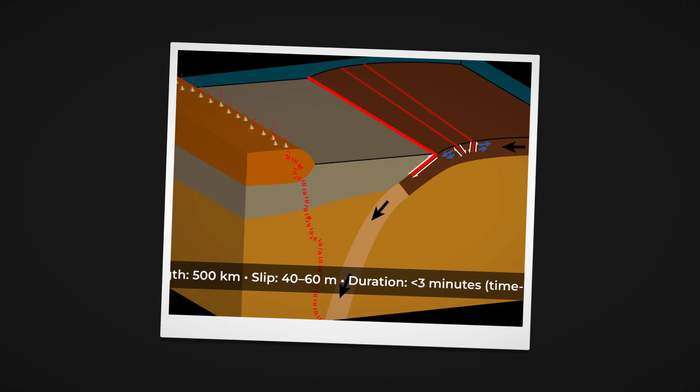On March 11, 2011, at 2:46 in the afternoon, a fault segment roughly 500 kilometers long beneath the Pacific Ocean off northeastern Japan slipped between 40 and 60 meters in under 3 minutes. The energy released was equivalent to approximately 9,000 Hiroshima bombs.

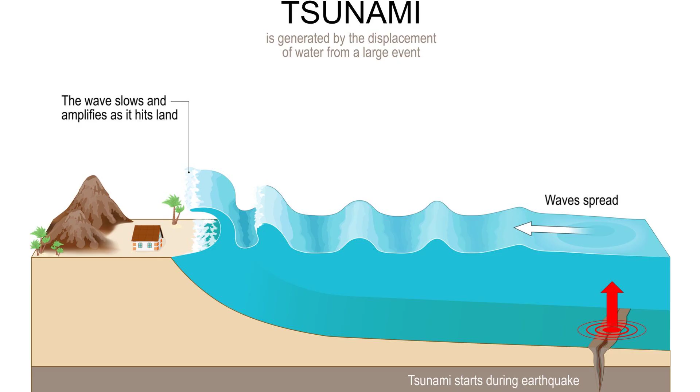The seafloor above the fault rose by several meters, and that rise transferred directly into the ocean above it. Within minutes, wave crests were moving toward the Tohoku coastline at the speed of a commercial jet aircraft. When they arrived, they were between 12 and 15 meters high. In some locations, they ran further inland than anyone's instruments had been positioned to measure.

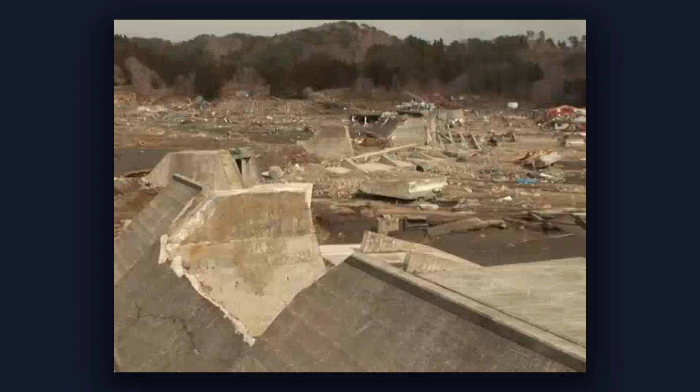The walls Japan had built to stop them were designed for 8-meter waves. They were overtopped in seconds. In several documented cases, the water crashing over the top of those walls fell with enough force to knock the structures apart from the landward side.

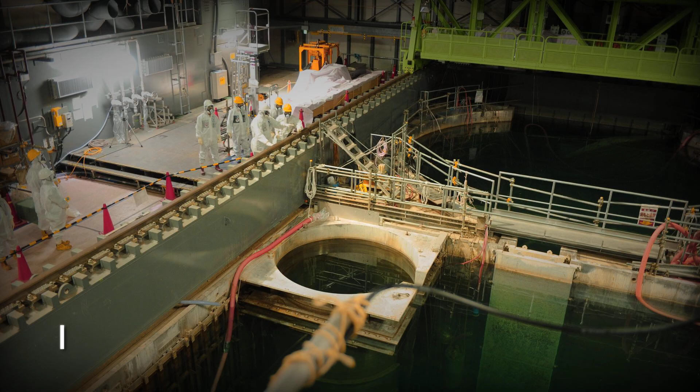More than 20,000 people were killed. Entire cities ceased to exist at the resolution they had occupied the morning before. The Fukushima Daiichi nuclear plant lost its backup generators to the flooding and entered a meltdown within days. Japan had been building coastal seawalls for decades before 2011.

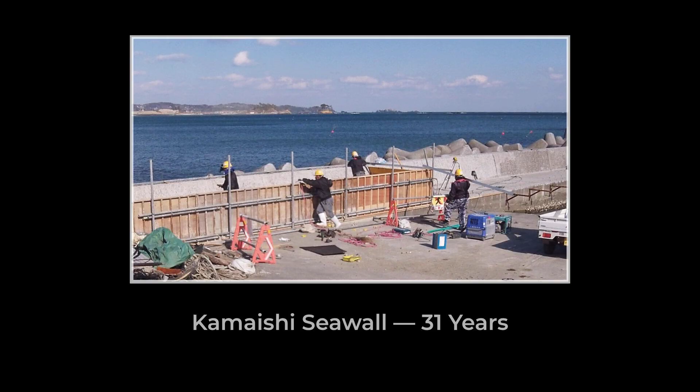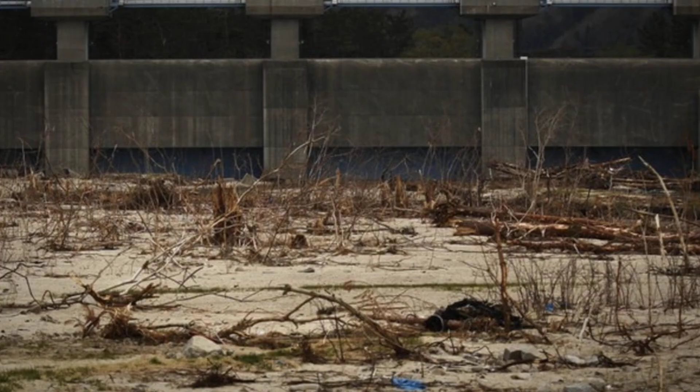The city of Kamaishi had what was then the largest seawall in the world, a structure that took 31 years to complete at a cost of $1.6 billion and which sat at the entrance to Kamaishi Bay. The 2011 tsunami overtopped it in minutes. Roughly 1,000 people in the city died anyway. That outcome did not mean the wall was irrelevant. It meant the wall had been designed within an understanding of the threat that the 2011 event rendered obsolete.

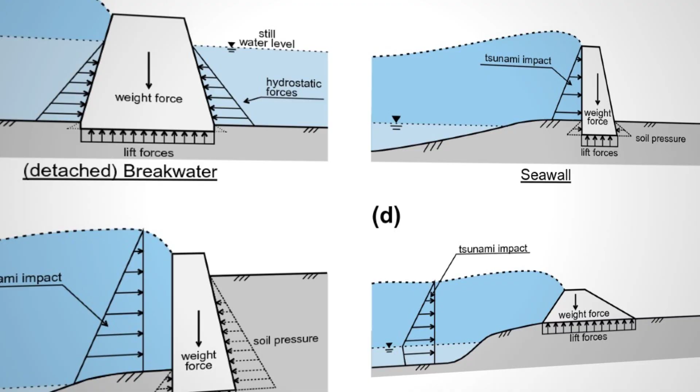The question Japan faced after the disaster was not whether to build walls. It was how to build walls that do not give people reasons to believe the ocean has been solved. The answer that emerged from years of wave tank experiments, geotechnical surveys, and engineering review was a seawall system that explicitly does not promise to stop the largest possible tsunami.

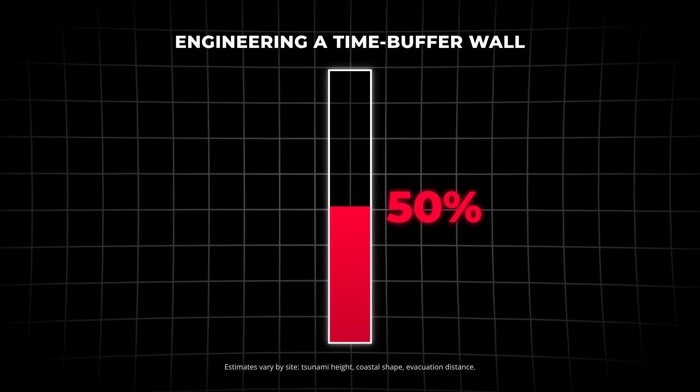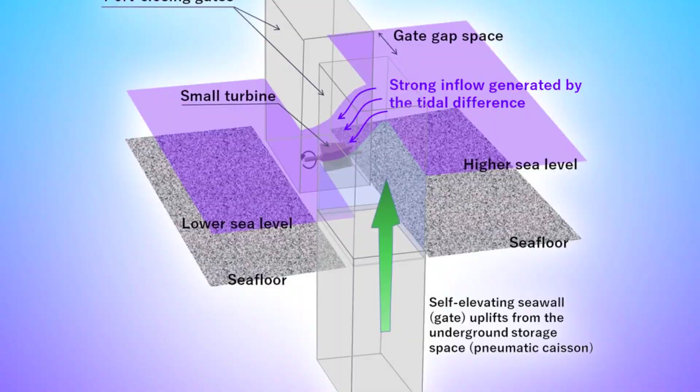It promises to reduce the destructive force of a medium-scale tsunami by 30 to 50%, and to delay wave energy long enough to give residents several additional minutes to move to high ground. Those minutes are the design specification. Everything else is engineering in service of that number.

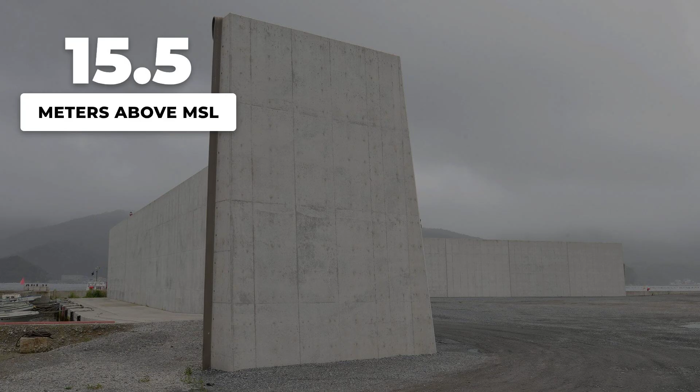The walls now rising along the Tohoku coastline in Iwate, Miyagi, and Fukushima prefectures stretch roughly 395 kilometers, with plans to extend the network to 430. The tallest sections reach 15.5 meters above mean sea level. The foundations beneath those sections descend 25 meters into the coastal sediment.

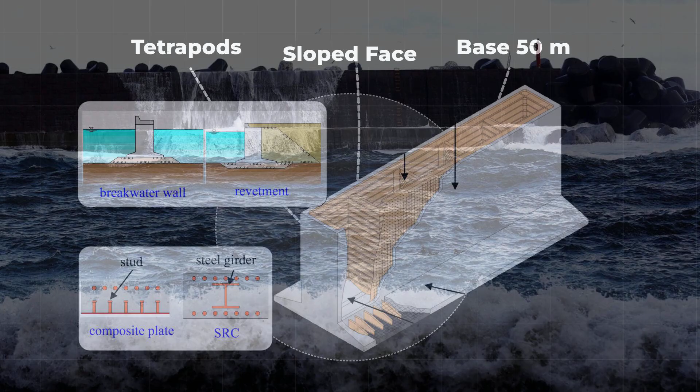The base of the widest sections extends 50 meters at the foot, narrowing upward in a trapezoidal profile that distributes horizontal wave impact across the full mass of the structure rather than concentrating it at any single point. Before any concrete is poured, the coastal sediment must be made capable of holding what is placed on it.

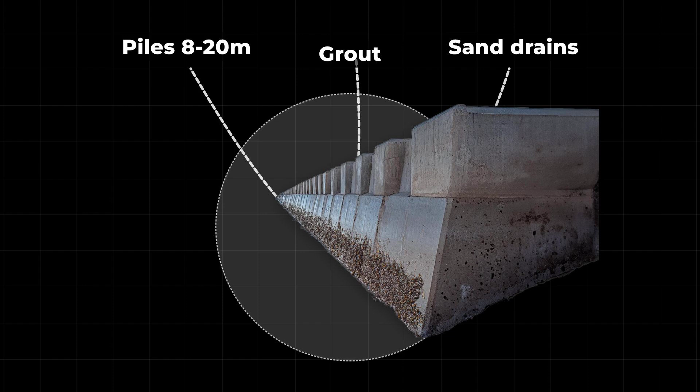Much of the Tohoku coastline sits on loose sandy fill and marine sediment that shifts, liquefies, and consolidates unevenly when loaded. A seawall 15 meters tall, pressing its full dead weight onto sediment that has not been treated, will settle differentially across its length, opening cracks in the base and rotating sections forward toward the sea. Ground improvement begins months before the main structure arrives.

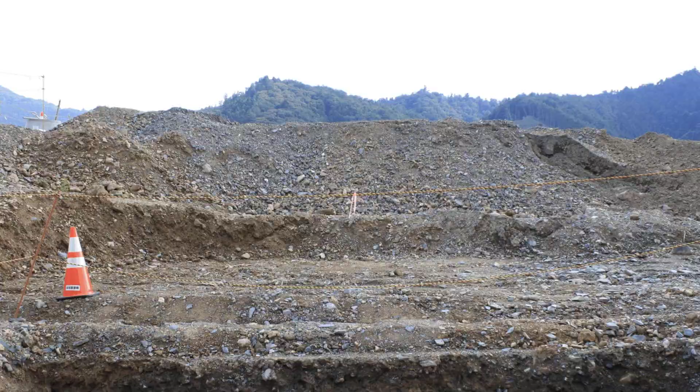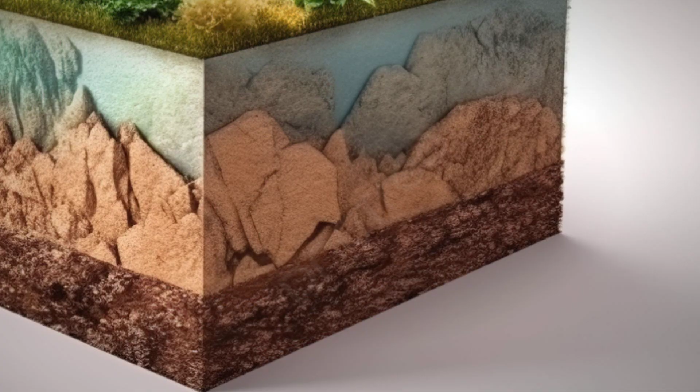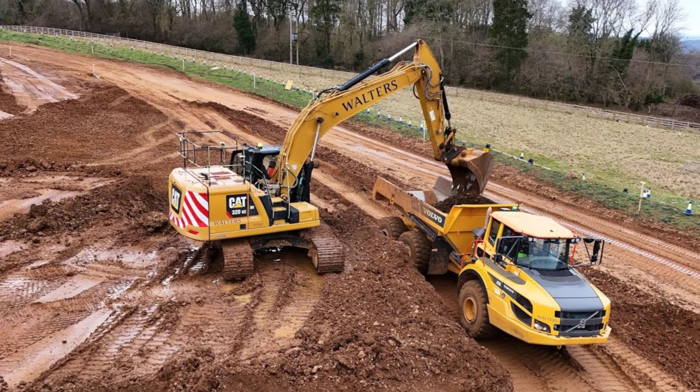Crews drill vertical piles of steel or concrete to depths that reach below the compressible layers into bearing strata. Between piles, they inject cement-stabilized grout that permeates the loose sediment and binds it. Sand drains are installed to accelerate the consolidation of saturated layers under preload surcharge, essentially placing temporary fill on top of the treated zone and allowing the weight to squeeze out excess pore water before the permanent structure goes on.

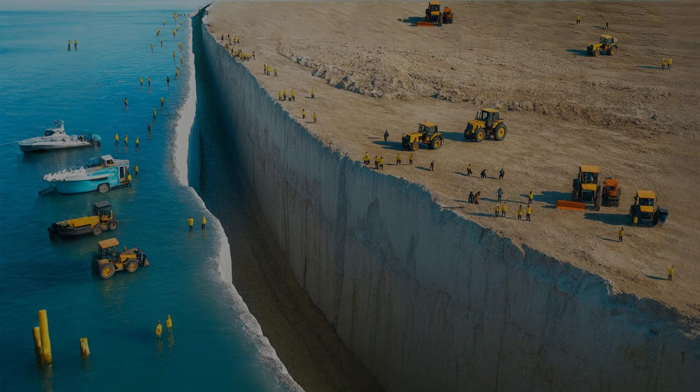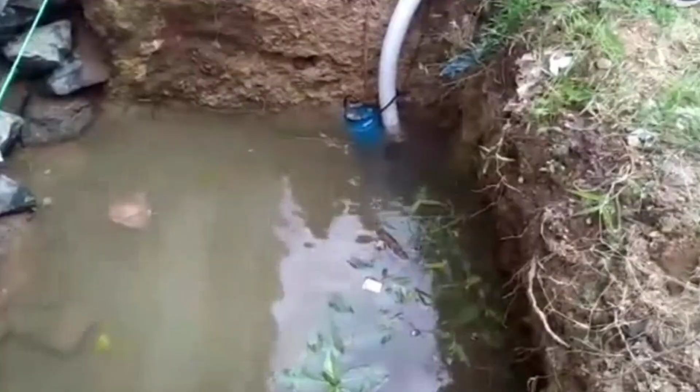Only after instrumentation confirms that settlement has stabilized within acceptable tolerances does the excavation for the foundation pit begin. The foundation pit in sections where the geology is most demanding goes more than 20 meters below grade. Temporary sheet pile walls hold the excavation open while dewatering pumps run continuously to keep the bottom dry enough to work in. A lean concrete blinding layer is poured across the bottom to seal it before the main reinforcement cage is assembled.

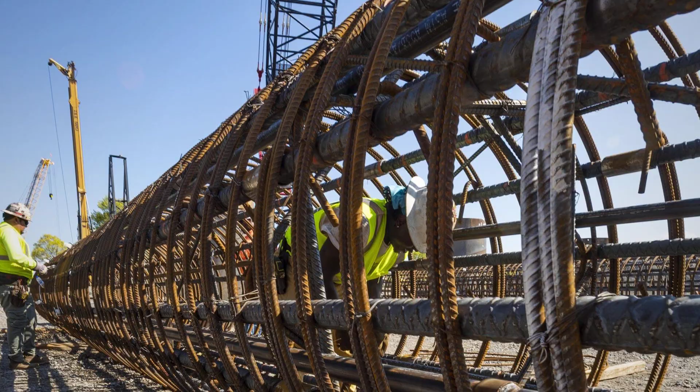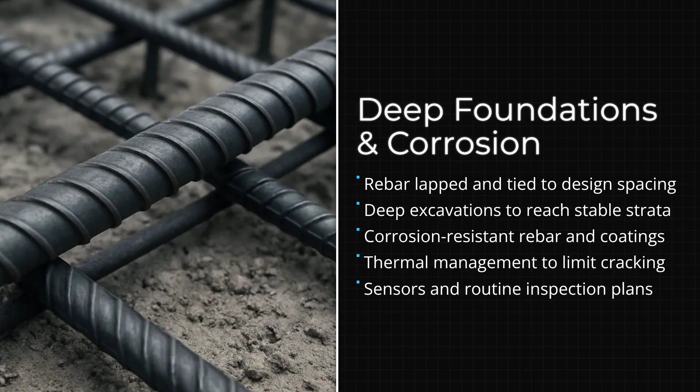The cage is not prefabricated off-site in its final form. It is built in place inside the pit, with horizontal and vertical bar layers lapped and tied at spacings determined by the structural design, using epoxy-coated or stainless steel reinforcement in the zones most directly exposed to seawater infiltration. Standard carbon steel corrodes in marine conditions at rates that reduce a wall's structural life by decades.

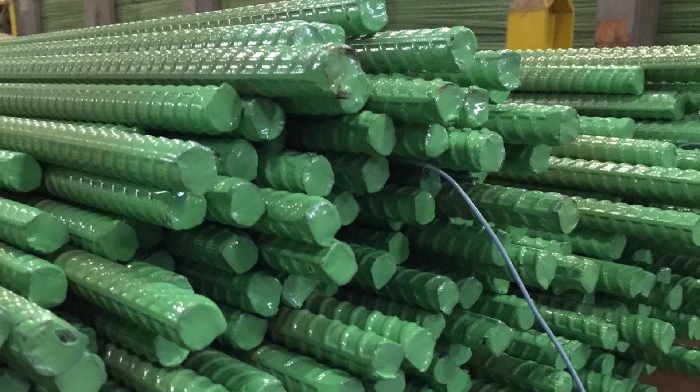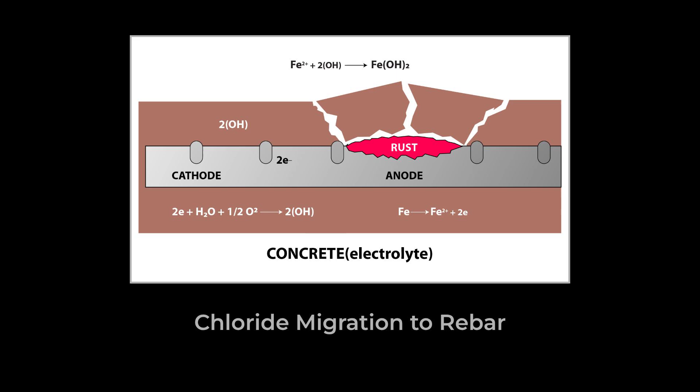The decision to use polymer-coated or stainless reinforcement in the splash and tidal zones is not a premium choice. It is the minimum specification for a structure expected to function for a century. The concrete mix itself is specified for durability against chloride penetration, the process by which dissolved salt migrates through concrete and reaches the reinforcing steel, initiating corrosion from within.

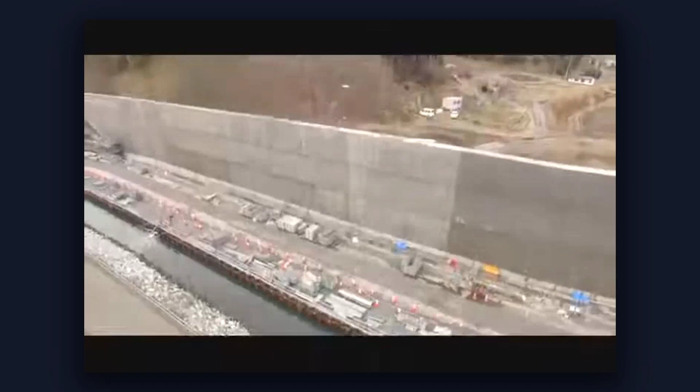A lower water-to-cement ratio, supplementary cementitious materials such as fly ash or blast furnace slag, and air entrainment to protect against freeze-thaw cycles are standard requirements in the Tohoku wall mix designs.

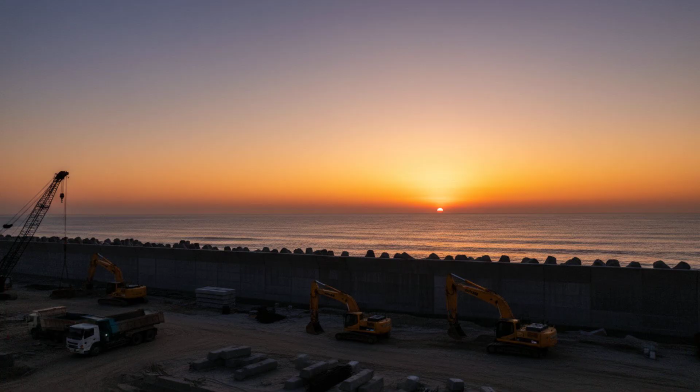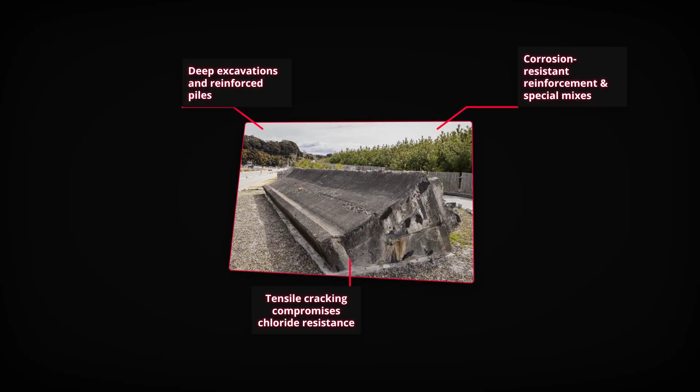Each concrete pour is divided into construction joints at intervals of several meters to control thermal cracking as the hydration heat releases. A mass of concrete large enough to form a seawall section generates internal temperatures that can exceed 80 degrees Celsius at the core if poured monolithically, and the temperature differential between core and surface causes tensile cracking that compromises the chloride resistance the mix was designed to provide. Thermal management of the pour is as important as the structural design.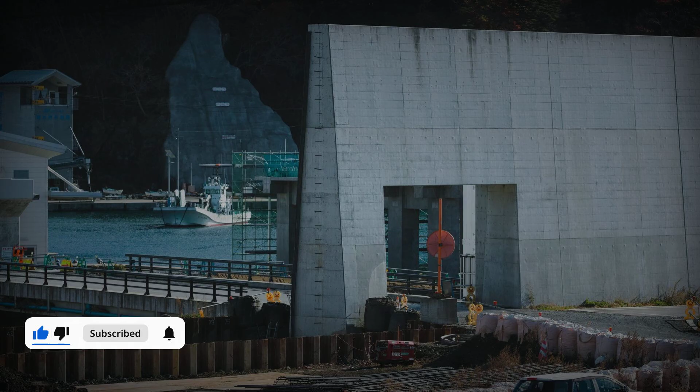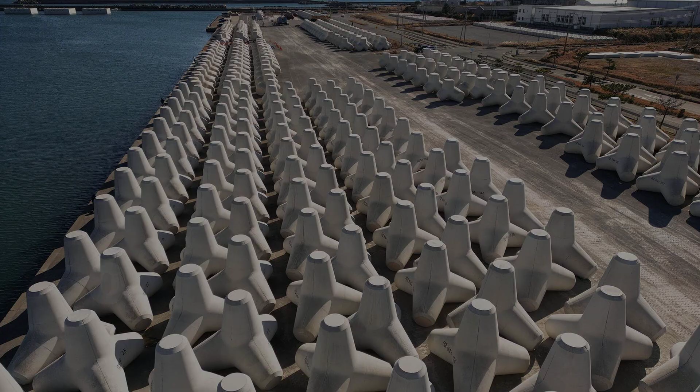Once the wall rises above grade, the ocean-facing surface is not left as flat concrete. Energy dissipation begins before the wave reaches the wall. Tetrapod concrete units, four-legged shapes that interlock with each other regardless of orientation, are placed in layers in front of the wall and across its base. Each tetrapod weighs between several tons and 50 tons, depending on the location's wave exposure.

A field of interlocked tetrapods forces incoming waves to thread through a chaotic three-dimensional matrix that breaks up the organized water column into turbulence, spray, and smaller fragments before the residual energy reaches the wall face. A wave that strikes a flat vertical concrete surface transmits nearly its full momentum into that surface. A wave that passes through 2 meters of interlocked tetrapod armor arrives at the wall face as a fraction of its original coherent force. The wall still absorbs that fraction, but the fraction is survivable where the original was not.

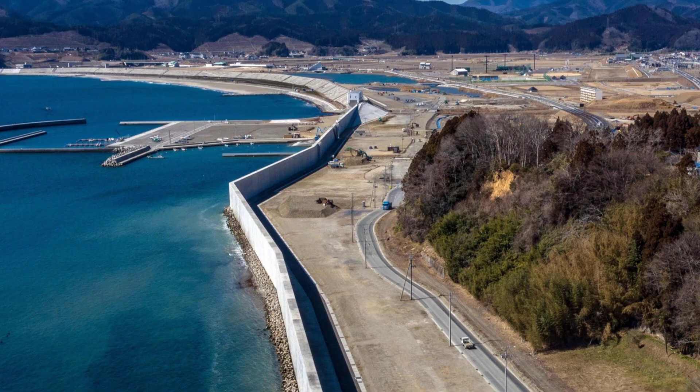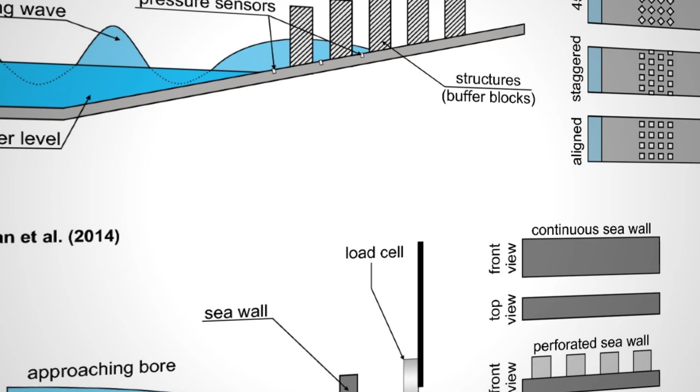The geometry of the wall face also manages the energy that gets through. Vertical walls reflect wave energy directly back seaward, which can increase the amplitude of subsequent incoming waves through constructive interference. The Tohoku walls use sloped faces in many sections, angled to direct the water upward and over rather than rebounding it horizontally. Splash reduction ledges at the crest deflect overtopping water backward onto the landward face, where it runs down into drainage channels, rather than falling freely as a coherent mass.

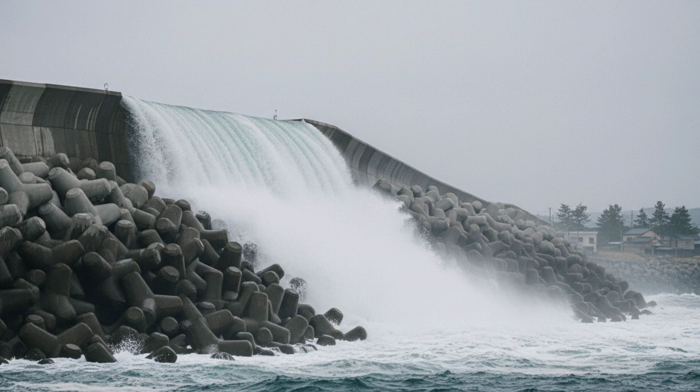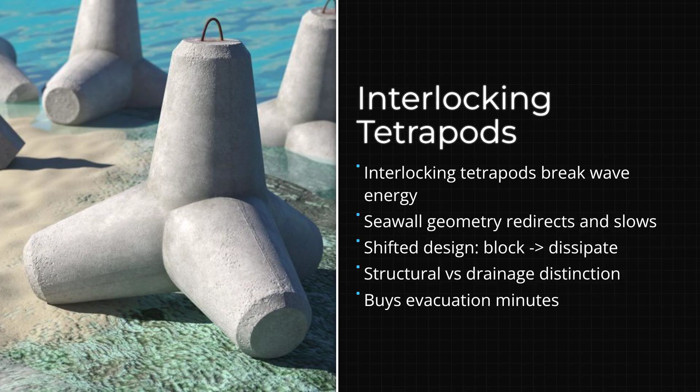A wave topping a vertical wall at speed falls as a continuous sheet of water that can flatten structures on the landward side. A wave topping a sloped crest with a deflection ledge becomes a spray that dissipates most of its energy in air before reaching the ground. The distinction between those two outcomes is the difference between a structural engineering problem and a drainage problem.

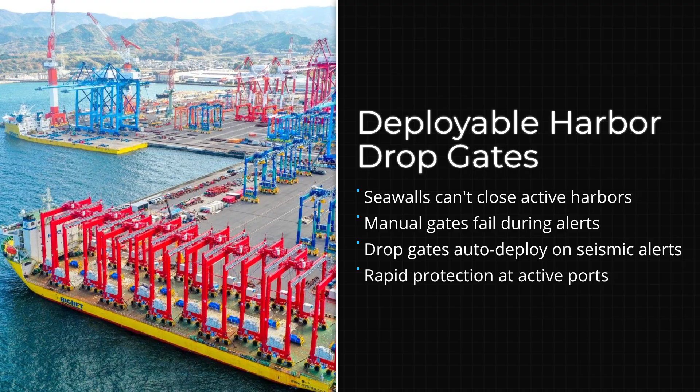Harbors present a constraint that solid walls cannot solve. Ships entering and leaving a port cannot pass through a continuous concrete barrier, and keeping gates manually operated in a populated commercial harbor during a tsunami warning is not a reliable method. Two gate configurations were developed for the Tohoku wall network.

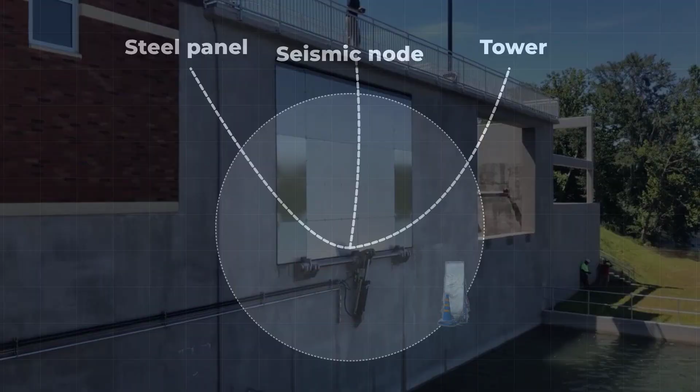The first is a top-down drop gate, a steel panel suspended horizontally between 2 concrete towers above the harbor entrance, normally raised clear of the water to allow vessel passage, and released by hydraulic motors to descend into guide slots in the tower walls when a warning is triggered. The panel drops under gravity and hydraulic pressure, sealing the harbour entrance within a few minutes of the warning signal.

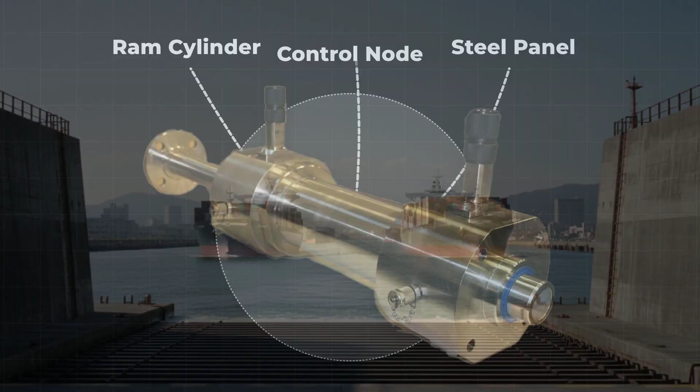The second configuration, used in narrower channels where overhead clearance for a tower structure is not available, is a bottom-up rising gate, a steel panel resting on the channel floor under normal conditions, lifted by hydraulic rams embedded in the channel walls when the warning signal arrives. Ships pass over it in its resting position. Under warning conditions, it rises to close off the entrance.

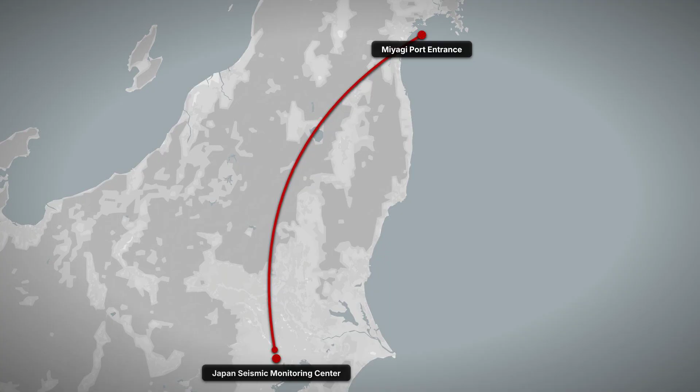Both gate types are connected to Japan's seismic monitoring system, which triggers a warning signal from sensors detecting ground acceleration, allowing gate closure to begin before the wave has traveled from its generation point to the coast.

In Rikuzentakata, the wall was not enough on its own. The city lost roughly 80% of its residential area in 2011, and the topography that remained after the destruction was flat coastal land, sitting only a few meters above sea level.

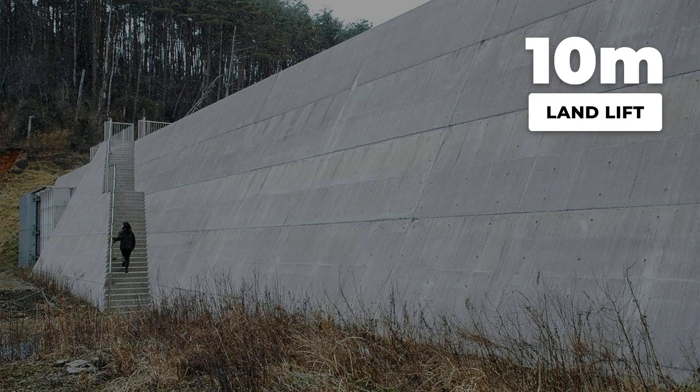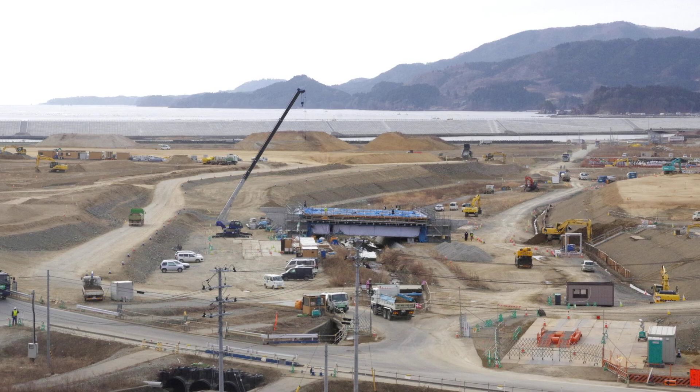A 12.5-meter seawall provided a defined amount of protection, but placing residential neighborhoods directly behind a wall of that height on land that low meant a single overtopping event would still flood everything. The decision the city reached was to raise the land itself.

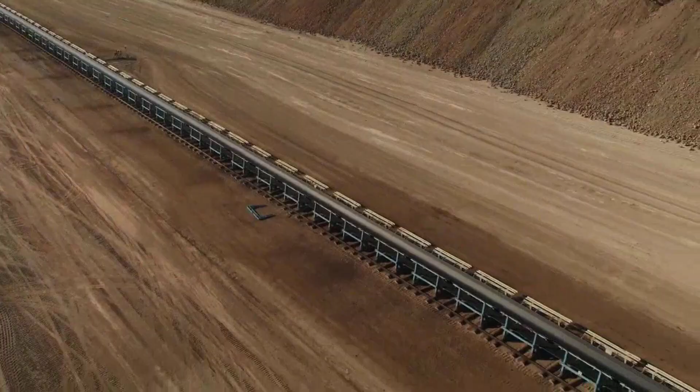A single conveyor belt system running 3 kilometers from the mountain slopes behind the city to the coastal plain transported earth continuously for 5 years, depositing enough material to raise the entire city center platform by 10 meters above its previous grade. The volume moved was equivalent to roughly 9 times the interior volume of the Tokyo Dome. The seawall was then built in front of the elevated platform.

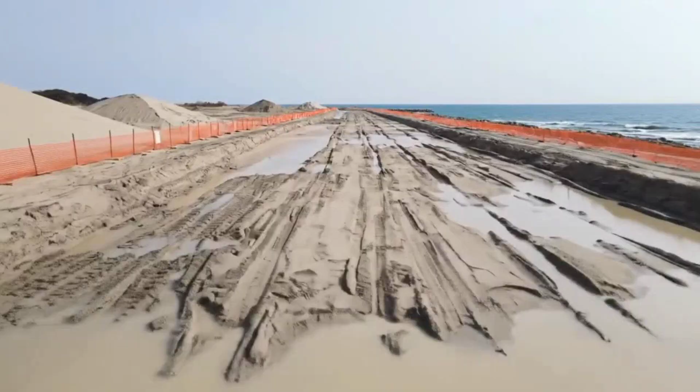A residence standing in the rebuilt city center is now 22 to 23 meters above the wave that destroyed the previous city. The engineering here was not the wall alone. The wall was the last element of a layered system that began with the ground. The controversy over this system is structural, not incidental.

Fishing communities along the Tohoku coast have been building their economies and their physical relationship with the ocean for generations. A wall 15 meters high does not just interrupt the view. It terminates the visual and physical connection between a community and the water that defines what that community does and how it organizes itself.

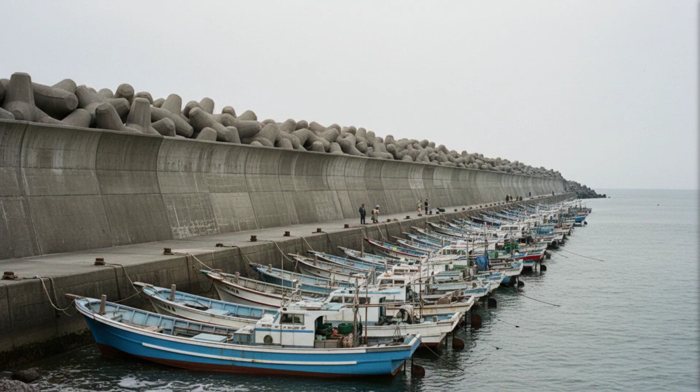Fishermen in several communities have formally opposed the walls on the grounds that they cannot observe sea conditions from their boats' traditional launch points, that the walls restrict tidal flow in ways that affect inshore fishing grounds, and that the false sense of security a wall provides may be more dangerous than the risk it addresses. That last argument is the engineering argument, not the cultural one.

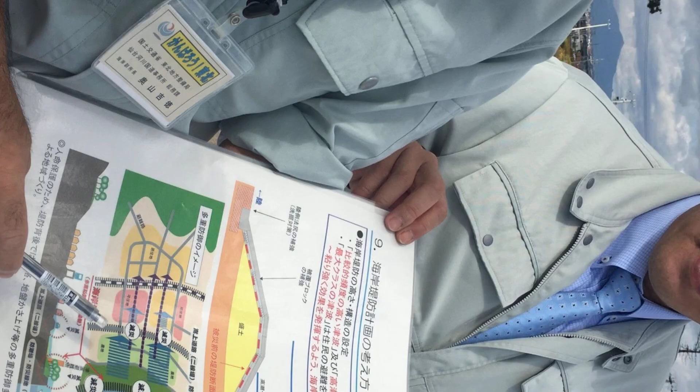The walls built before 2011 in Kamaishi and elsewhere produced measurable behavior changes. Residents near those walls were documented as being slower to evacuate when warning sounded, because the presence of a wall created an expectation of protection that removed the urgency. The 2011 tsunami moved faster than that expectation could be corrected.

Ecologists have pointed out that the construction footprint of a 400-kilometer continuous concrete structure along one of the world's more productive coastal zones involves disruption to tidal flat habitats, kelp forests, and the sediment transport patterns that maintain those habitats.

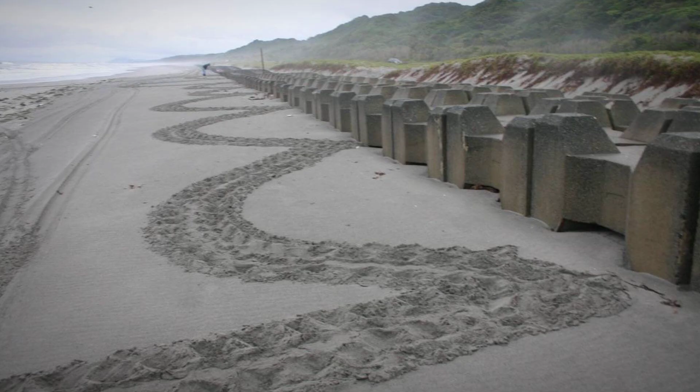Some researchers studying the Tohoku coastline have argued that mixed coastal forests, sand dune systems, and maintained mangrove zones provide meaningful wave attenuation at a fraction of the cost, and without the community severance that the concrete walls impose. Japan's program has not included large-scale investment in those alternatives. The program is a concrete program, and the time pressure imposed by the reconstruction mandate and the political urgency created by 2011 produced a concrete solution at concrete speed.

The physics has not changed. The Nankai Trough, a subduction zone running southwest of Japan's main islands, is assessed by Japanese seismologists as capable of generating a magnitude 9 or higher earthquake with a probability of 60 to 70% in the next 30 years. The modeling of that event produces wave estimates that in some scenarios approach or exceed the height of the walls

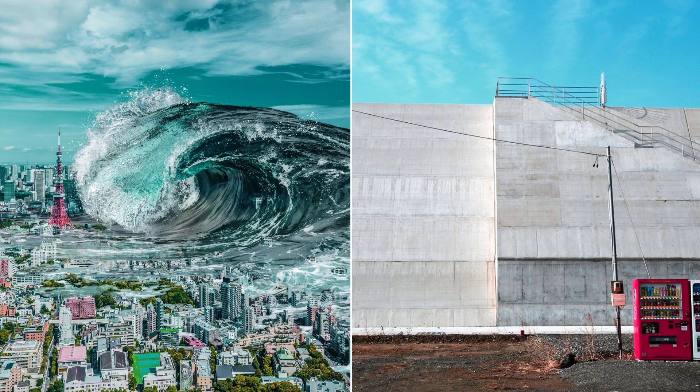now standing. The walls are not designed for the largest possible event. The engineers who built them say so in the technical literature. The walls are designed for a specific range of wave heights, and for events within that range, they will reduce force and delay arrival by minutes.

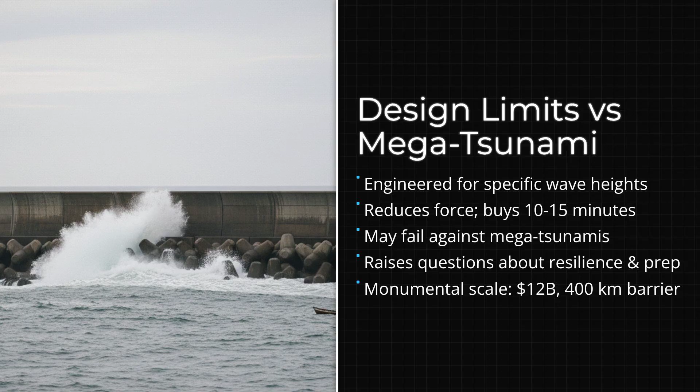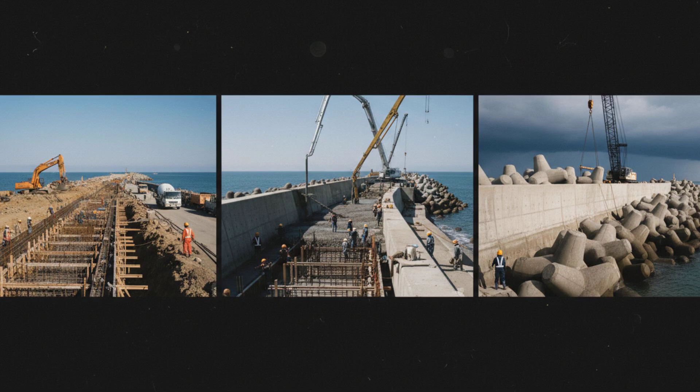For events above that range, the walls will be overtopped, and the same 10 to 15 minutes that the wall's geometry provides as a time buffer for an ordinary tsunami event will still exist, but the wave energy arriving behind them will be different. $12 billion, 400 kilometers of concrete, 25-meter foundations, 30,000 workers across more than a decade of construction. The seawall is the largest coastal defense infrastructure ever built in Japan.

It will not stop the ocean. It was not designed to. It was designed to change the arithmetic of a specific range of wave events by enough minutes that the number of people who reach high ground before the water arrives is measurably larger than it would have been without it.

Whether that arithmetic holds when the Nankai Trough releases, whether the evacuation culture the walls are supposed to supplement is actually stronger or weaker with the walls in place, and whether the communities that live behind them for the next century will use the time those walls buy, is not an engineering question. The concrete is already there.